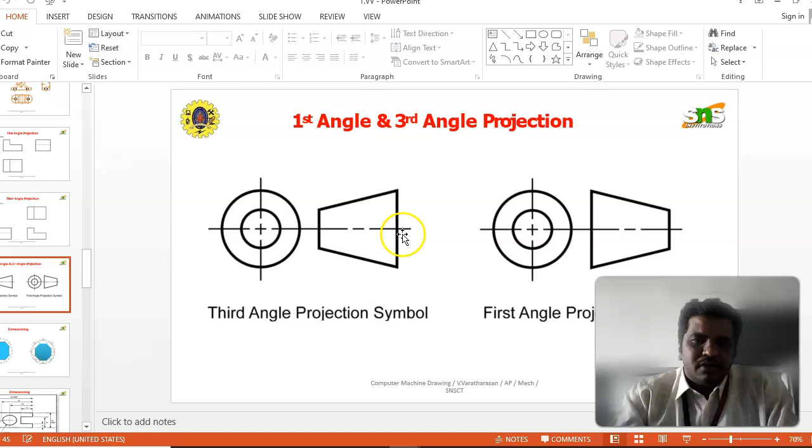In our Asian countries, we are always following the first angle of projection. Some parts of the US and UK countries, they are following the third angle of projections. So this is the symbolic representation.

So next one is the dimensioning. In the dimensioning part, we are giving so much importance, because not only in industrial drawing but also in normal manual drawing methodology, the dimensioning and lettering is given so much importance, because it gives so much clear representation in the presentation part. So the presentation of the particular drawing will be good and legible.

Then only the observer, if we take a machinist, can identify whether the dimensions of the particular product are understandable. So here some sort of dimensioning methodologies and tools which are followed in the previous manual drawing method are represented.

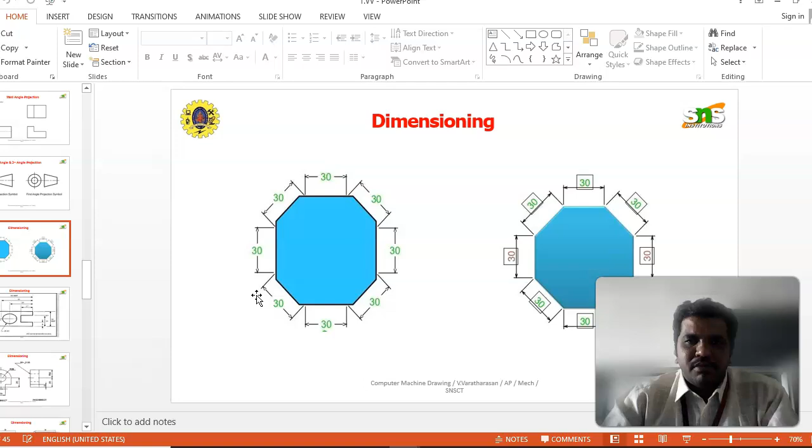We can give the dimension representation by using an arrowhead. The arrowhead is a closed arrowhead with shading. An unclosed arrowhead without shading is also a bad representation, and it is an incorrect method. So we just want to follow this correct method.

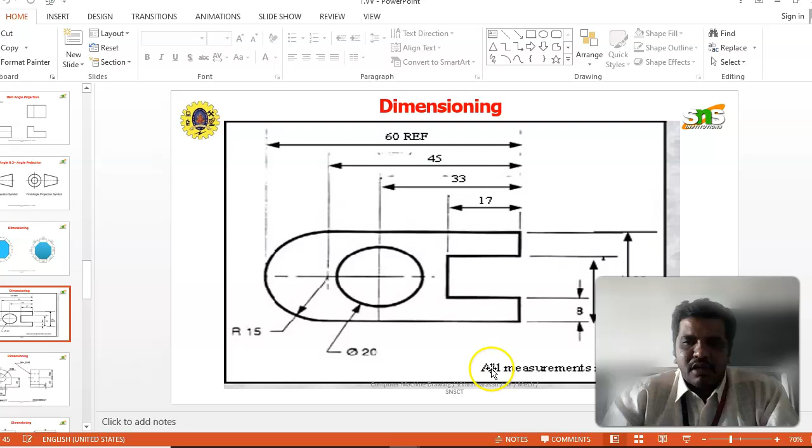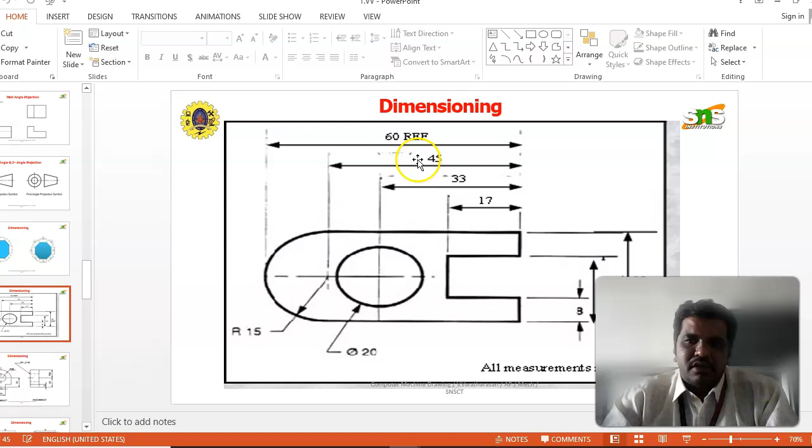These are the measurements given, but in the title block they are representing all dimensions, all measurements in millimeters. This is a very important terminology we are using in the title block. Without stating that all dimensions are in mm, it would be ambiguous whether it is centimeter or meter. So a lot of dimension terminologies we are going to use.

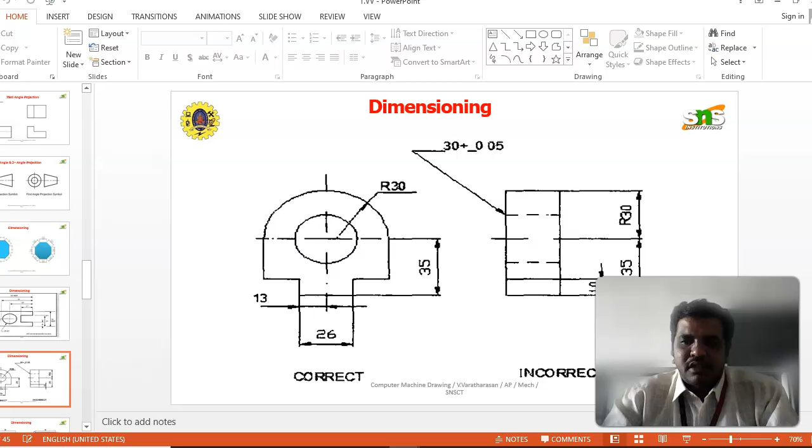Here we are giving the comparison between the correct and incorrect diagram. This one on the left side is the correct diagram, and this one on the right side is the incorrect diagram. The correct diagram shows the symbols and arrowhead symbols used in a legible manner, while the incorrect diagram uses them in a non-legible manner.

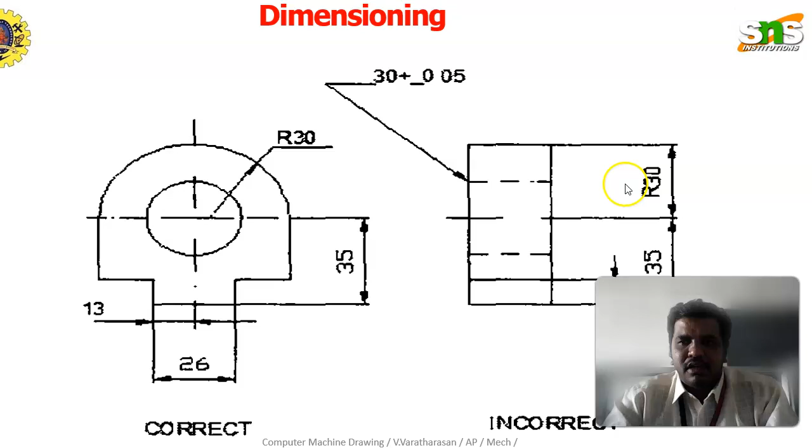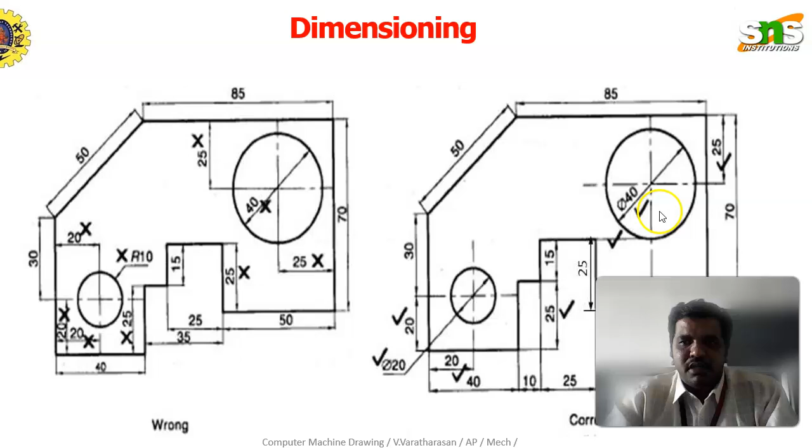So here also the same thing will be happening. The 50 is the measurement of the particular square rod. In the particular square block, there is a circular hole. The dimension of the circular hole by the center point, that distance also will be given, and the overall length and width of the particular measurement also will be given.

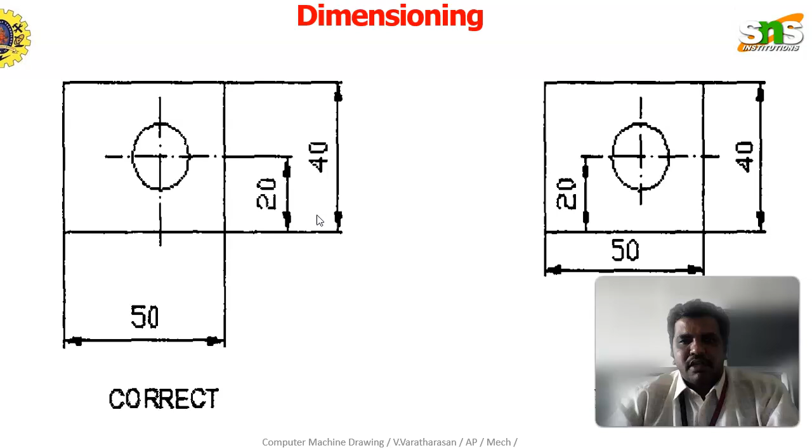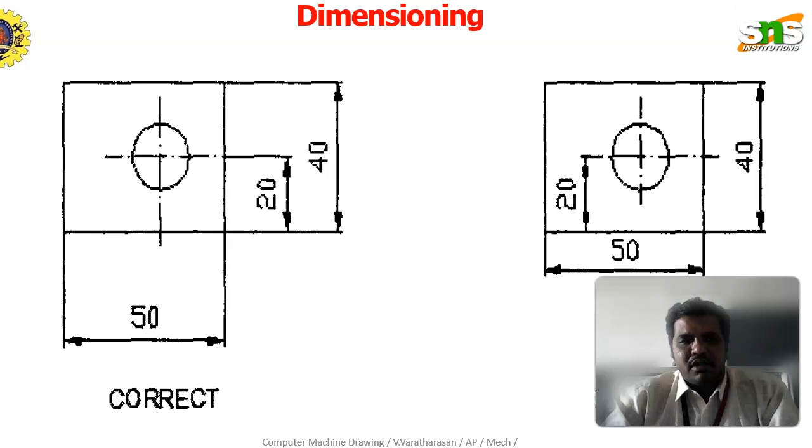So in between the dimensions, we must give a proper ratio of gap. Without gap, if we are representing the dimensions over and over, it will not look good, and it will also be an incorrect one. So here we see the correct dimension and the incorrect dimension methodology in the diagram representation.

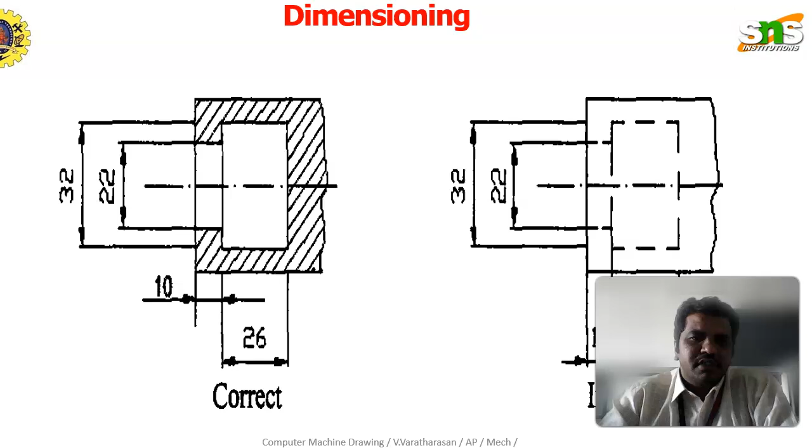Here, lettering is another important terminology, and it is an important part of the diagram. The lettering should also be very legible. If you are using lettering, it should follow a proper format - both capital letters and smaller case letters, and numerals also, given proper spacing, using an HB pencil. That is a very important thing.

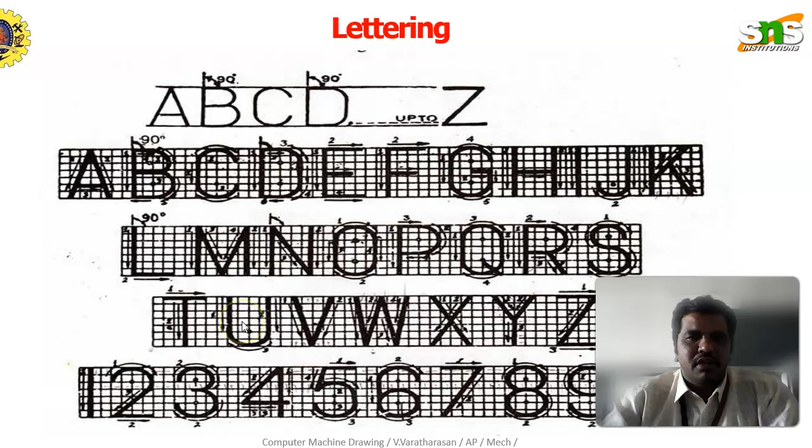So these are the proper lettering and writing formats given here. The lettering - both capital and smaller case letters - are represented in this slide.

After lettering, if you are given these types of parts, surfaces and planes, for each and every plane we just want to draw a proper format. If you are going to draw a circle, there is a certain format of methods and procedure for drawing it, and the same applies to the hexagon and pentagon.

If you are going to draw the pentagon on a plane or lamina sheet, you can't directly draw the pentagonal shape with respect to the base side dimension alone. By using the base side dimension and also the 108 degree inner angle, or the external angle of 72 degree, we take the angle of representation. Using the angle of line, we can measure the particular baseline length, and by using a compass or divider, we can represent the particular measurement in the pentagonal shape.

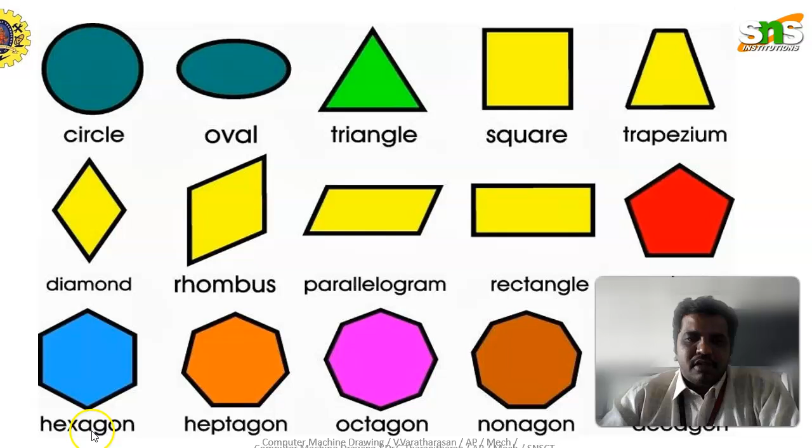The same procedure applies to the hexagon as well. There are different surfaces available, as we already saw with the circle, octagon, and decagon. There are also some complicated surfaces - curved surfaces, sphere, torus, etc.

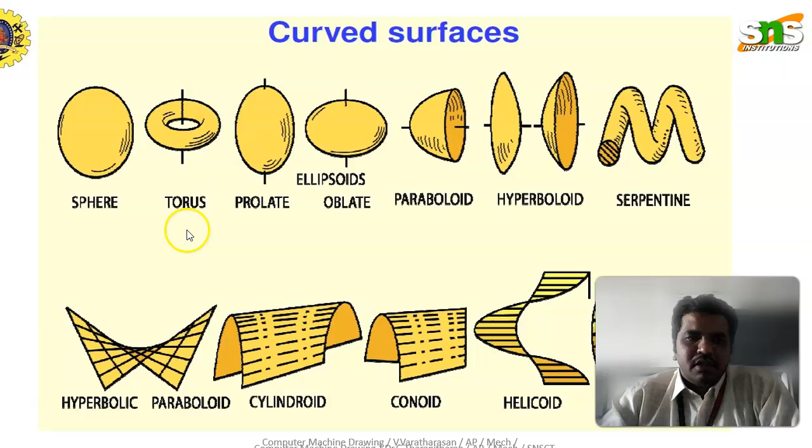So this is about scales, bisecting scales. These are all the things we are going to see in the next video. Thank you.